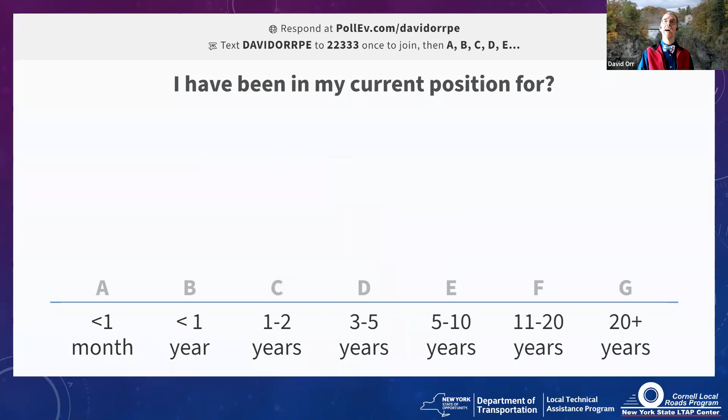Okay, and then next on the plate, how long have you been in your current position? We started asking this question at the beginning of the year and got quite a few folks who are brand new highway officials starting in January, but haven't seen as many, but I do see one today that's less than a month. Over here on the Q&A, we've got a variety of folks, 6 years, less than a year. Okay, so again, quite a variety, and that's good, hopefully you'll pick something up today that you can take home and use and go from there. I see a 40 plus, okay, maybe we'll have you help teach us in the future.

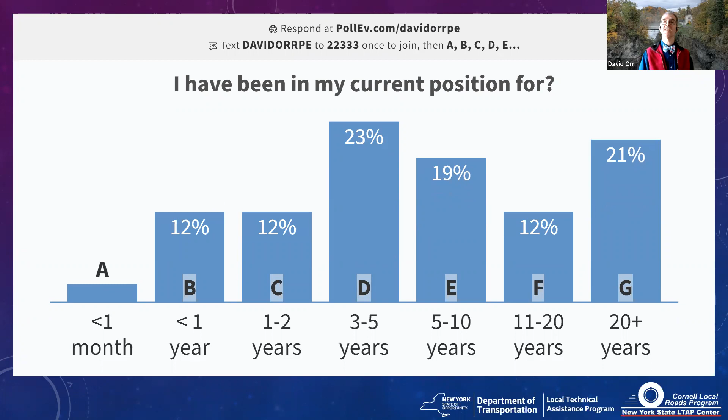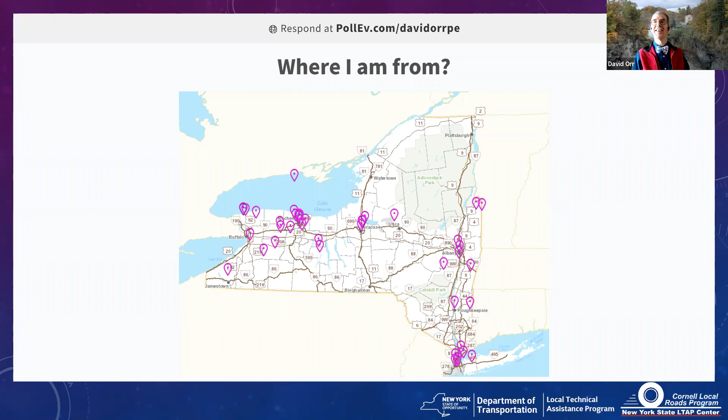I'll give you a reminder of this at the end. So let's go ahead and get started talking about drainage.

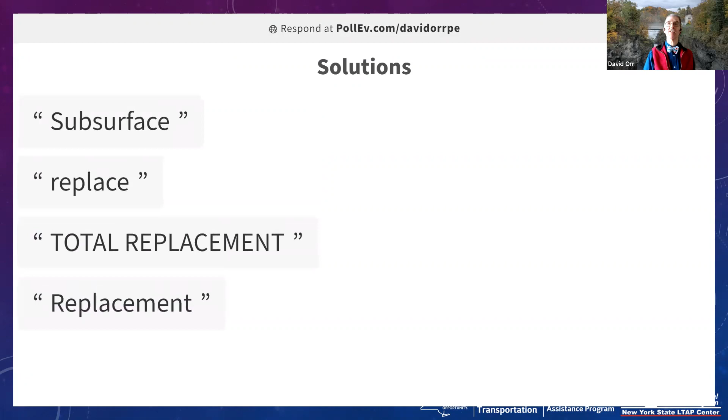Yeah, sometimes drainage problems are easy, you know what you need to do. It's pretty expensive to replace it, and so we're probably going to have to do something major here. Now this particular situation is one where it actually failed twice in one year because of major rain events. This was around when Irene and Lee came through.

If you'll notice, the land is a little bit higher than the roadway in a few spots, especially down towards the end, there's a spot, and even here the road's a little bit higher. What happened was the road became like a stream channel. A lot of our older roads, this happens. You want to make sure the water can get away. So when you reconstruct, think about the drainage, think about the long-term. You certainly don't want to have to come back and do this particular one again. Keep that in mind as we talk about things.

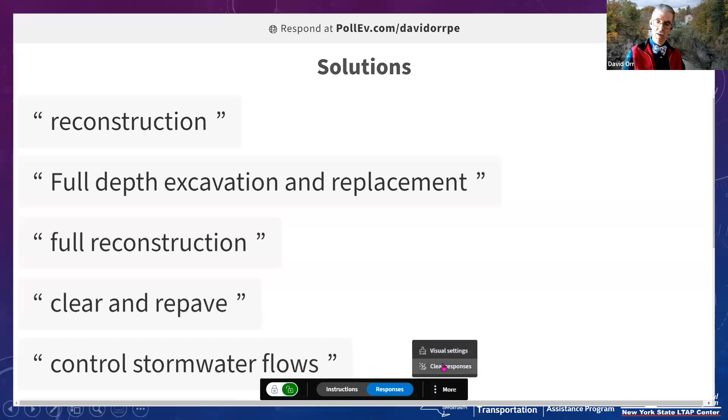Our next one is a roadway that was chip sealed the previous year, and this is in the spring, weather not too different than we've been seeing the last few days, and you can see the chip seal has failed. So what do you think is the solution here?

Somebody said repave in the Q&A. Okay, pave it. Maybe a mill and pave.

Nobody's put anything in the poll yet, or at least it hasn't shown up. Maybe a new wearing course.

But again, when we're dealing with roadways, we're dealing with drainage. You need to think about where the water problem is coming from, and knowing some history can really help. You've got to think about the drainage.

In this particular case, we'll go back to the picture. This had been a gravel road for many, many years. It actually goes down a pretty good hill, and there's actually a relatively good crown.

I'll see if I can get the poll to show up. Maybe they're just not showing up for some reason. Let me quickly check that and see what's going on. Well, let's see if it'll show up here. Ah, technology. There we go, got it working now.

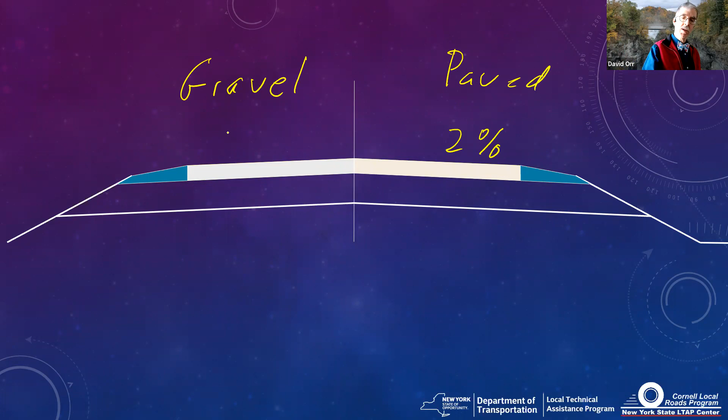But if you think about it, if you've got a roadway that is paved, you need a cross slope that's a little flatter because you've got a nice hard surface that can drain off — usually 2%, or 1/4 inch per foot. If it's gravel or unpaved, we might go as much as 6% to drain the water away.

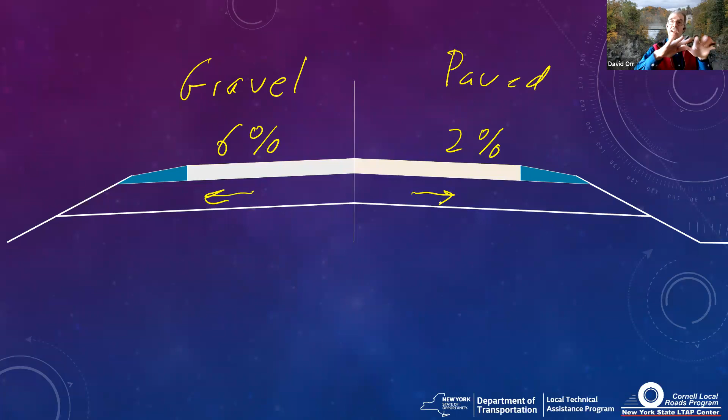And we want to drain the base as well, so we need each layer to have that same slope so the water can drain out. We don't want to trap water out on the edge, so we want a free-draining layer if at all possible. Obviously you can't do that in an urban area, but it really does help quite a bit to have that slope. Now, if you're getting a chip seal, you might go with a little bit steeper than 2%.

It's not quite paved, a little rougher. The other thing you want to make sure you think about is these shoulders over here. Those shoulders need to have a little bit extra cross slope to them. So these are things to think about, getting the water off the roof, through our gutters, our ditches.

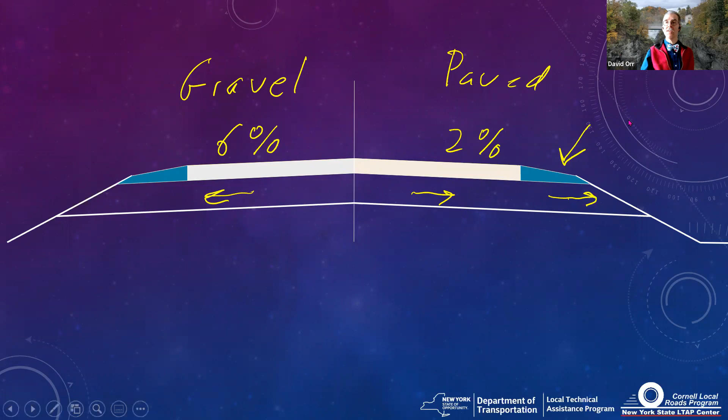Standing water, freeze thaw, all good possibilities. Poor drainage, yep. Too flat, there you go, somebody got it. It's too flat. This is a real well-known problem for gravel roads, is if they get a flat spot, vehicles travel on that flat spot and they create this problem. So crowns are very important. You got to get the water off the roadway, okay?

Now there's a series of videos out by the South Dakota LTAP Center that are pretty cool, and we'll just show a little bit on roadway shape, small snippet. If you want the longer one, look it up or get a hold of us, we can get you a copy.

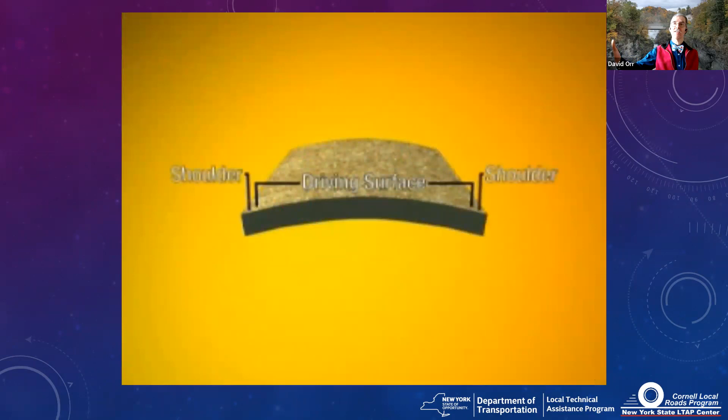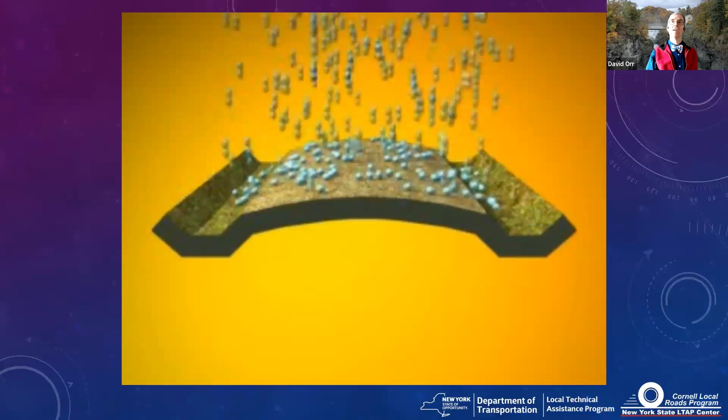So you need a shape to it. The water's got to go off to the sides. The main purpose of the shape of all these elements is to drain water efficiently. Drain the water away, number one item on a good roadway.

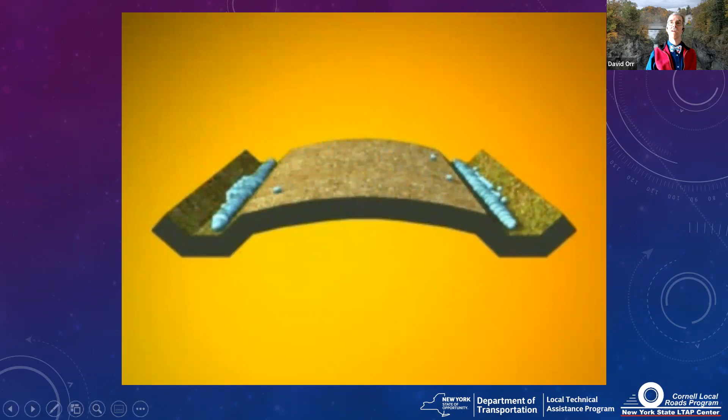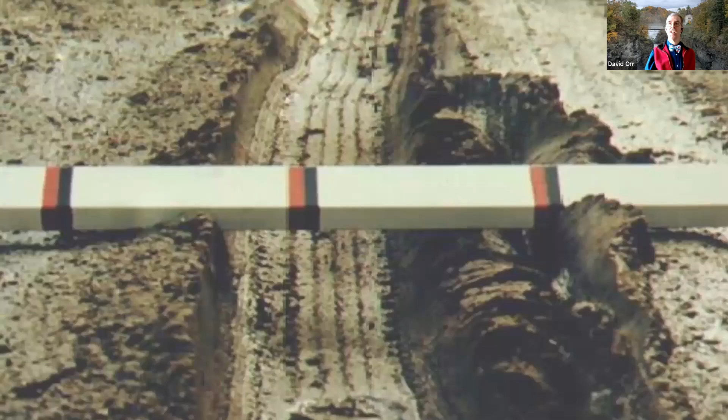That rut was caused by one pass of an old Ford Econoline van that we no longer have. I hit it about 5 miles an hour. If I hit it any faster, the van would still be there. Now, some would say it's a Ford, not a loss, but hey, we had that thing for another 25 years.

So come on, we needed to keep it in good shape. So drainage is part of it. The other part that's a problem, though, that I found was there was no gravel in the mix. That gravel is important to the roadway. There was sand, clay, and silt, mostly silt.

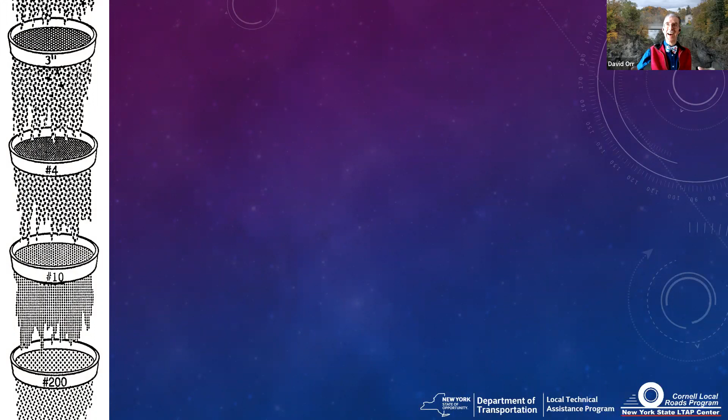When you're building a roadway, the single most important thing is the quality of the base. Your subgrade is the native material, you can't do a lot about that unless you want to spend a lot of money. But your base, you can spend money and create a good base.

So what is a good base in most of New York State because of our freeze-thaw conditions that we deal with? Well, you want to have a percent of gravel, between 50 and 70% gravel. So you need a lot of gravel sized particles, these are the larger particles. And in your handout, we list the sizes that are available. So you really want the gravel to give you strength.

No matter where you are in that prism of the roadway, you need about 25 to 40% sand. The sand helps you with drainage, helps make it dense, pack well, but it still allows the water to have some flowing characteristics. And then there are two lines that we have here.

One line is at 8%, and that's sort of the maximum for anything underneath the pavement. I'd really like 5, but I'll live with 8. We'll talk about why 8% in a little bit, but 8% is sort of the upper limit. The other number that we have here is 15%. Anything above about 15% in spring thaw, it's just a mess. There's not enough strength to it. You've got to keep the fines content down, the silts and the clays.

So this is important. And if you've got a roadway that's got a little bit too much silt and clay in it, the negative effects start to get hold of you. And if you're buying, for instance, state spec item 4, as we call it, but it's actually a type 4 spec, it's for sub-base. It's for deeper layers underneath a really good base, underneath a blacktop.

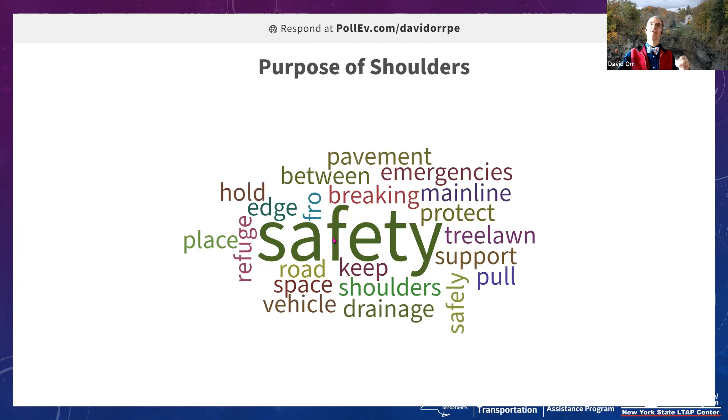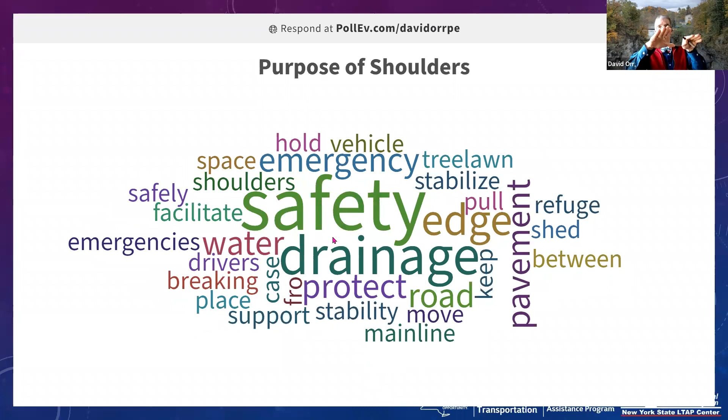Safety is one, emergencies, yeah. Drainage - one of the most important things shoulders do is that if we wind up running off the road a little bit, just a small amount for emergencies, it doesn't cause us to have a crash. I see road support showing up a lot - that's really important, we back that roadway up so it doesn't push out, it doesn't crack. It stabilizes everything. Drainage is on the list too - it helps carry the water from the roadway down to the ditch. That's why it typically has a slightly steeper slope, because it builds up over time and tends to be rougher, so it needs to have a little bit of a slope to it. Not a huge rollover, but a little bit of rollover.

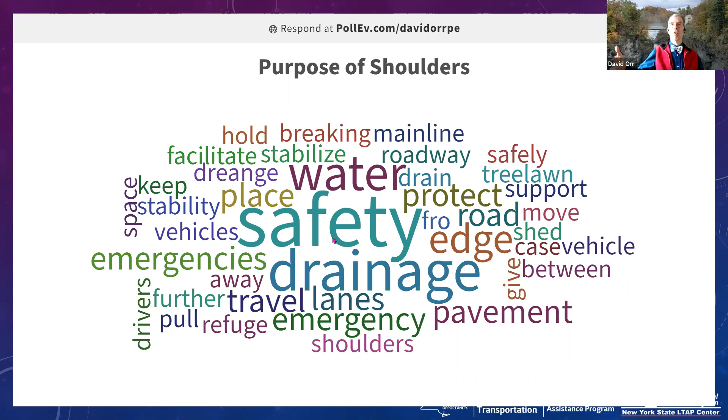Now, what I don't see on here, and I'm a little surprised by, but we all do live in the north - maybe everybody forgot about the fact that 2 days ago there was lots of snow still all over the place. We do use those shoulders to store snow when we don't have time to cut the shoulders. So sometimes we'll use them for snow storage.

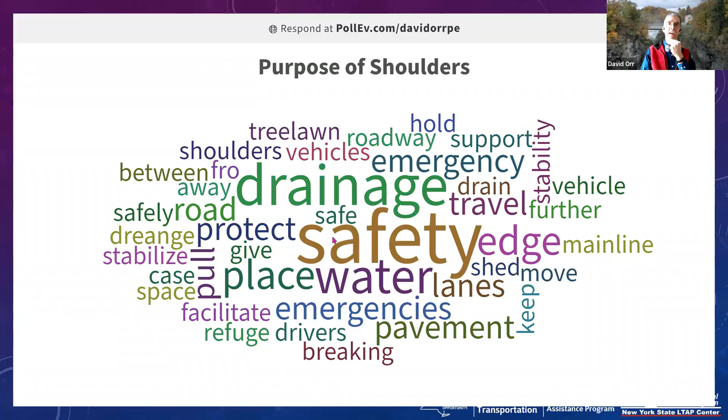Somebody asked in the Q&A what's the name of the device or tool you'll use to measure the proper slope for a road, the crown. There are 4 or 5 ways you can measure that. I'm a big fan of the hand level and an engineer or carpenter's rule, and you can just measure that out. You might use a tape measure. Some people make a grade board. They'll take a 2 by 4 and a 4 foot level. You can use just a 4 foot level, but they'll also make ones 8, 10 feet long out of plywood, and they can actually put a notch on it to adjust the level, and you can measure the grade that way. Construction people really like those, and they fit in the back of a pickup truck. And of course, you could survey it, but most of the time we're using hand tools because we're trying to just do it in the field, okay?

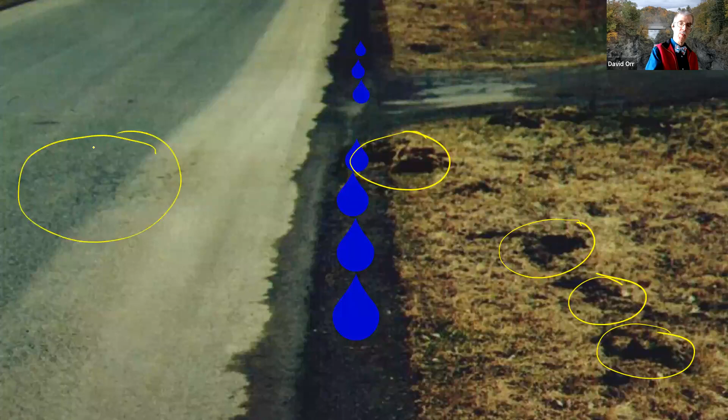Now, shoulders need to be cut, but when they're cut, they need to be done properly, and that's done with a grader, okay? There is a technique you can use, other tools, but the grader is really the best tool for the job. A snowplow is the worst tool for the job. This happened, somebody pushed it with a snowplow. You can see where they hit the edge of the shoulder and threw stuff in people's yard. All this is really going to do is help get water back under the roadway. You can actually see where it's saturating the roadway. You can see spots where we're starting to get some incipient cracking going on. And of course, you're going to get that neighbor who's a little upset with you because you pushed dirt and stuff into their yard, and can't really say that I blame them. So you got to cut shoulders on a regular basis, but you got to get it so the water can drain away, number 1 rule. Now, one thing I haven't mentioned is urban areas.

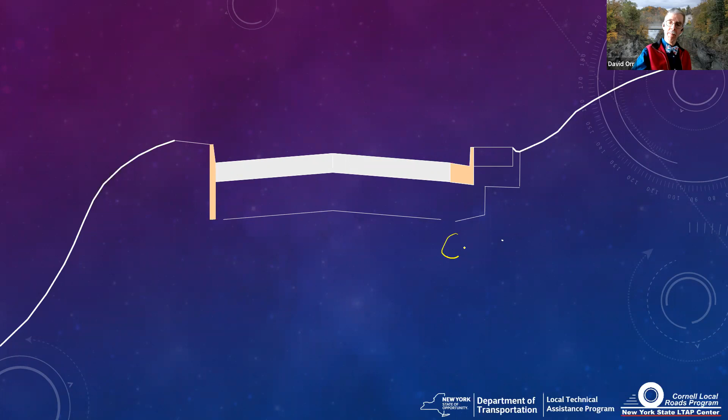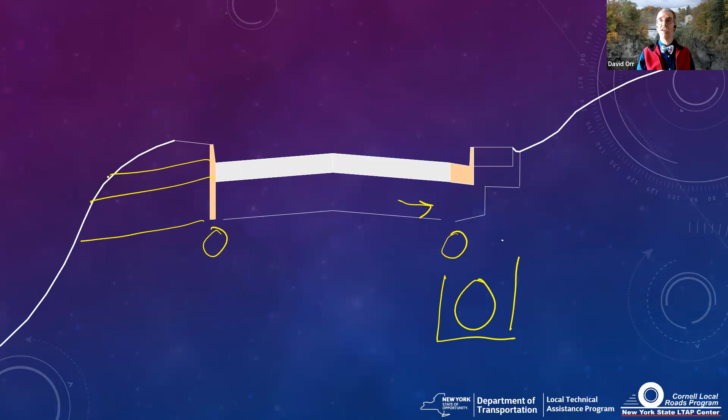Curbs and gutters act as our shoulder and ditches in an urban area. So they're pretty important as well because they're carrying the water. Now, when you're doing subsurface water investigations, and we're going to be talking about that in the second half of our hour together, that's the perfect time to think about putting in any subsurface drains when you're putting in your curbs and your gutters. And remember, you need to drain that base out as well, either by having subsurface drains, taking the subsurface water down to your stormwater system. You're not going to be able to come in here and put in a free draining layer. I don't think people would like it if you start putting ditches back in their front yards. So again, think about where the water is going. Don't trap that water, okay?

Now, something we have to worry about at the end of winter or in the middle of winter is freeze thaw. Freeze thaw, in fact, is actually one of the drivers on the quality of our gravel. So got to be thinking about that. So let me explain freeze thaw to you. It's really because of a combination of permeability and capillarity.

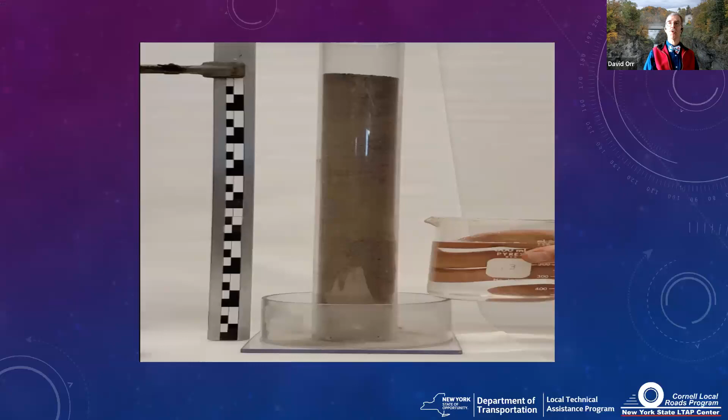So let me start by showing you a video on capillarity. Watch, this is a time-lapse video. We poured water into a frost tube. There's a reservoir at the bottom, and you can see how the water actually pulls up over time from the reservoir at the bottom. The finer the material, the higher it's going to rise. You can see in only 1 hour, it's up a good almost 3.5 inches from the water surface. And over time, it will go right to the top of this little sand column, which is 8, 9 inches tall. If it's a really fine material like a silt, it can be even higher, and clays can even be higher than that. So capillarity is an issue.

And of course, we also worry how quickly the water flows through these various materials, okay? So just to show you that one more time, you can see how quickly it goes up.

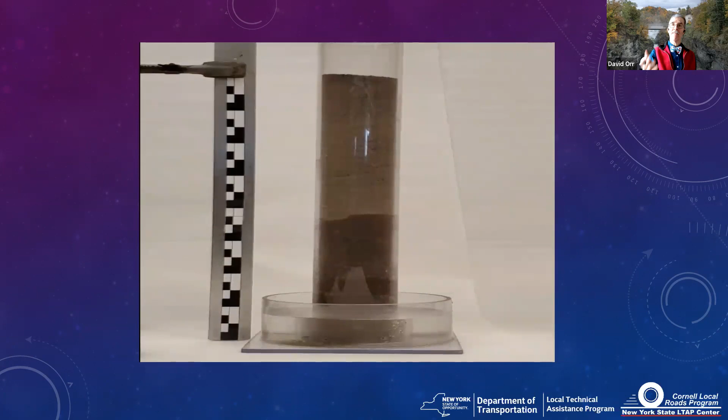Now, why does this matter? Well, because if you have that free water available, it gets pulled up by capillarity, and you can actually get frost lenses forming. Here's a video from the Army Corps of Engineers. There's a newer version on the web, but the video part I'm going to show you is still the same. It's still an old frost cabinet with a high-tech timing device. So here's the video, frost action in soils. You can see the time lapse of actual frost issues. Now they've got it in a freezing cabinet, projected at normal speed, and you can see what's going on here. It's a time lapse of several weeks seen in several minutes.

Okay, let's see if this thing will keep playing. There we go. So there's our high-tech timing device. And you can see the scale on the left is moving, and there's the line of frost that they show you in the video.

This is a silty material, which is really bad for frost issues. They started the experiment at a water content of... okay, I'm off by a second... 19% water. So a lot of water in there, a pretty high amount.

Remember, there's a pool of water at the bottom being pulled up by capillarity. If that pool of water is available, little ice lenses form, picking the roadway up. That's not good because it creates heaving, which we don't want for a variety of reasons. When they did this experiment, they had to move the camera and their timing device to the bottom as the frost keeps moving.

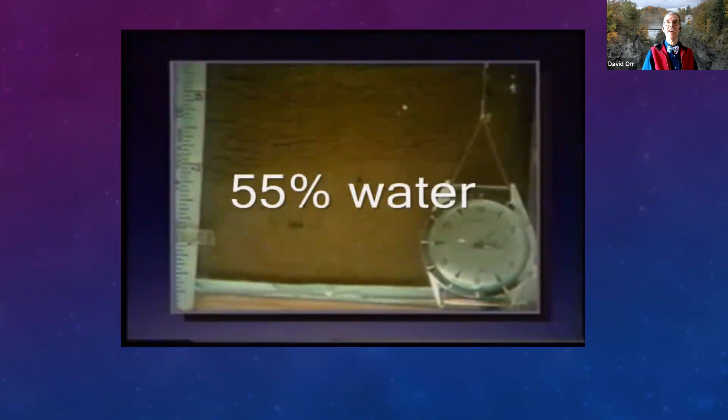This is a 6-inch high sample. Water content was 19% at the start, and 55% at the end — a huge amount of water pulled into the sample. That's not good for anybody. And of course, 4 inches of heaving, that's 2/3 the height of the sample.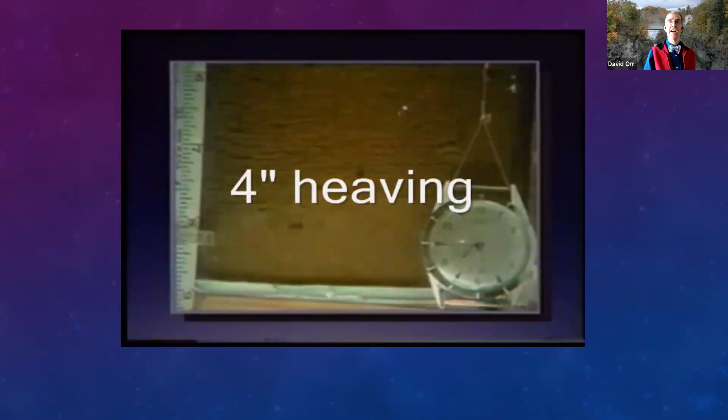This is a New Hampshire silt, again a really bad material. There are two issues: first, you get movement of the roadway; second, all that water is now in the roadway, and it may not be thin lenses, it may be thick ones like this — this one's 3/4 of an inch across.

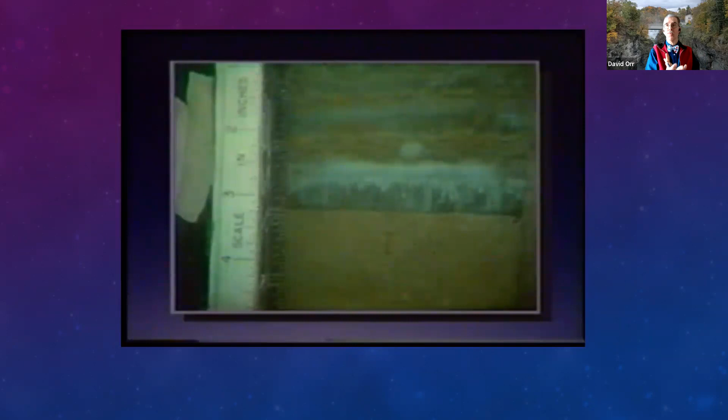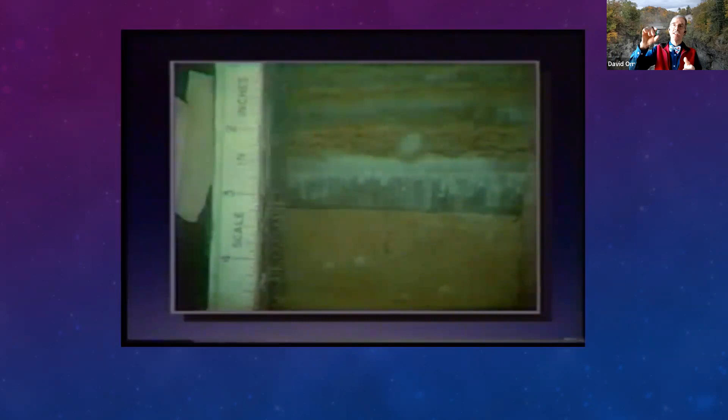I've seen culverts being replaced in winter because of problems with 1, 2, 3-inch ice lenses, not uncommon especially with glacial tills like we have here in New York State. All that water has to drain out, and it may not drain out where we want it to. Keep that in mind.

And of course, it leads to our friend, the pothole. We are entering pothole season, though we actually had that last month with the first thaw. Look underneath, make sure you take care of your drainage, and make sure you get your surface in good shape as well.

Now, you could do what they do in Vermont — they just put up a sign that says frost heaves, okay? That may not be our first choice.

We cannot replace down below the depth of frost. Frost depths vary quite a bit in New York State, but they're going to be 2-3 feet or more depending on where you are. And if you put in good clean material, the frost actually goes deeper because those clean materials freeze faster. So don't try to just go below the depth of the frost.

We're not building a foundation for a house and water lines, we're building a roadway. So try to have uniformity to everything so the road goes up and down as a unit. That actually works — in fact, that's what's happening on most of our roadways.

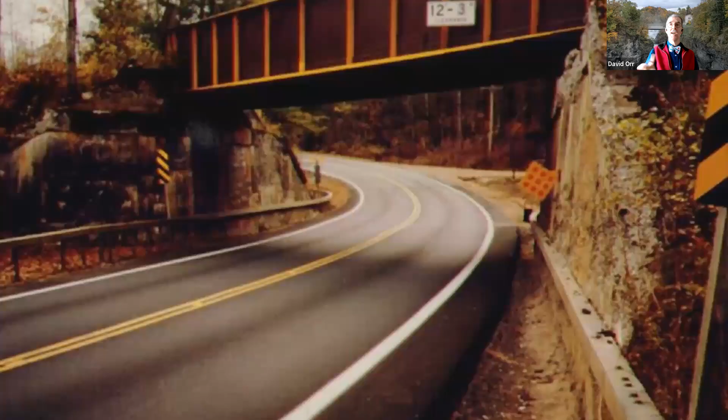Here's a picture I took — no, I was up to Lake Placid for a conference about 20 years ago. I'm driving through the Adirondacks, and we went under a bridge in a place called Thendara near Old Forge. You can see it was paved around the corner, it looked really nice. But by the following spring, the road had already begun to heave.

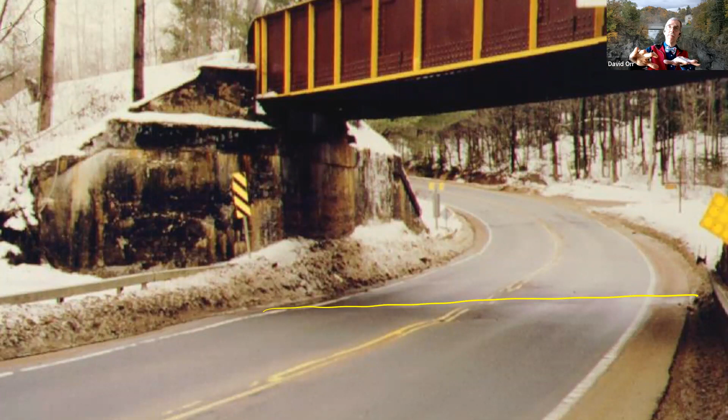Now, this is a bit of a challenge. There's a culvert going diagonally underneath the railroad bridge. You can actually see the location of it because it's heaved, and the culvert stayed the same. It's a box, very difficult to fix. Eventually the state had to come in and put approach slabs to reduce this problem. Very difficult situation, but don't just pave it if you know you've got a heaving problem.

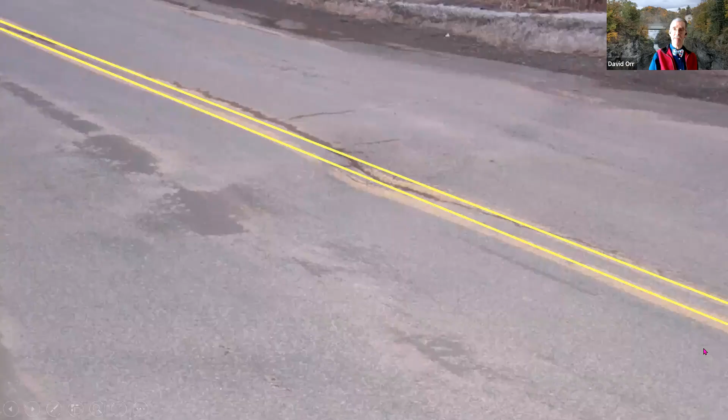And if you're thinking that's a problem only because of the high box culvert — well, no, it happens on a lot of pavements. Here's another place. Obviously the yellow lines I added to the picture, you can actually see a dip in the center line of the roadway. I don't think that was put in that way. What's happened is there's a small, I think 12-inch corrugated metal pipe underneath there.

It stays perfectly still, and the road heaved up around it because we backfilled it with nice clean material. All of us as engineers, we like to spec clean material that doesn't frost heave. But the road around it moved because it does frost heave.

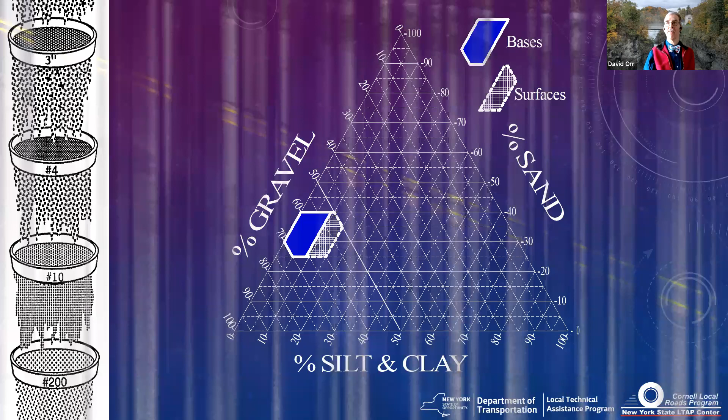So let's go back to our drawing that we had before. Remember, I showed you these percentages, and I mentioned there was a breakpoint line here at 8%, where I don't want to be above 8% for my base gravel. The reason is it turns out above about 8%, the frost action starts to become a dominant feature in the mix.

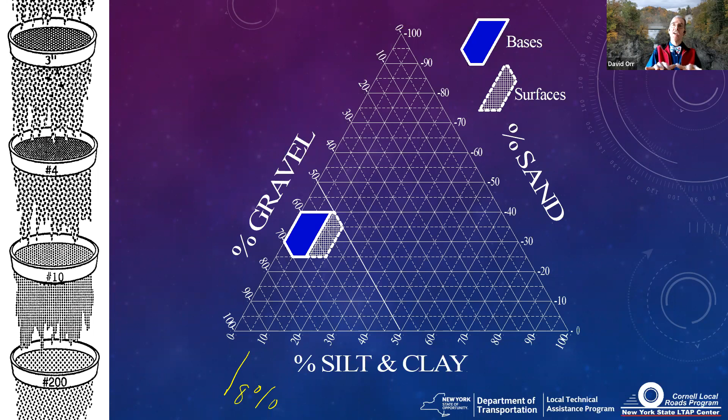And so this is a problem for us. If you're using that type 4 material, the sub-base material in the state spec, it allows 10%. So you can get frost heaving even though the material is inside the specification. So 8% or less is even better, 5% would be even better than that. Reducing that frost characteristic reduces how much water it holds as it pulls the water up in the middle of the winter and stays soft in the spring. Somebody put into the Q&A that if you've got a bridge like the one in Thendara, frost effects

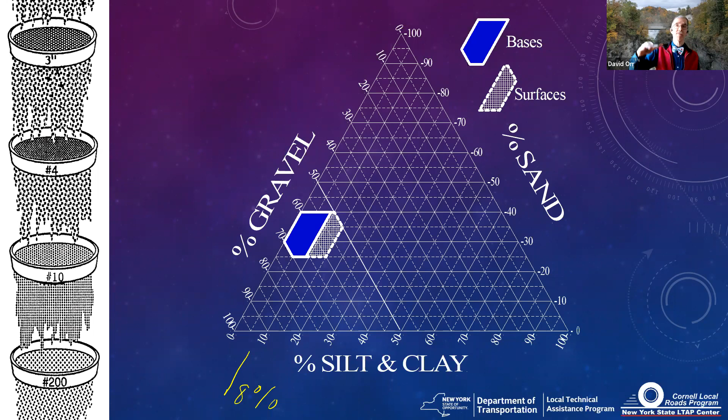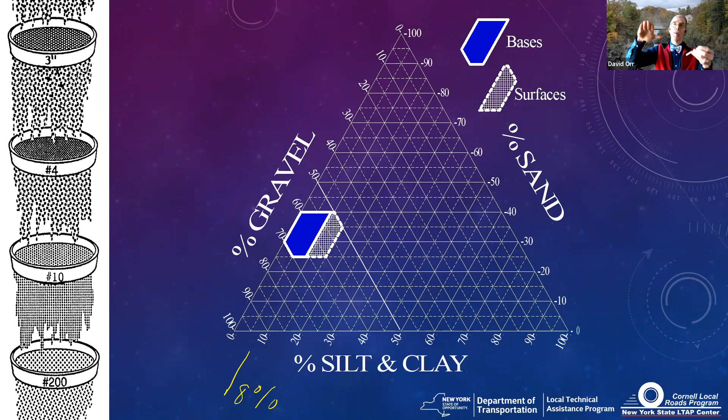may affect the height clearance. When I worked in Yates County, we had a railroad bridge where it would actually change, you could see it over the year, the roadway would move. So you have to think about that: what is your actual clearance? It's the lowest clearance during the winter when the road's heaved up, okay?

If you've got a road that looks like this in the spring, and you see little spots all over, don't just assume the pavement is old. Check it out, do a test pit, check to see what's going on underneath. I will not be surprised if you start seeing fines contents higher than 8% - 12, 13, 14% would not be uncommon. So look carefully at good quality in the gravel, and then you can think about putting in subsurface drains, okay?

Now, when a pavement is frozen in the winter, it is extremely strong. That is when the pavement is strongest, when it's completely frozen. But of course, when spring thaw comes along, it thaws from the top down. Yeah, a little from the bottom, but mostly from the top down because of this thing called the sun - that's where the heat comes from.

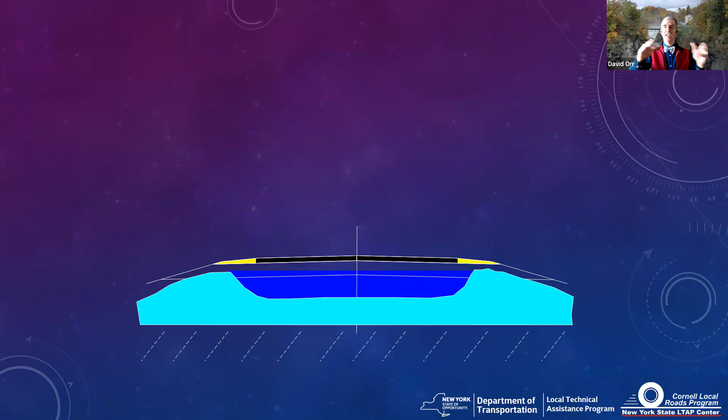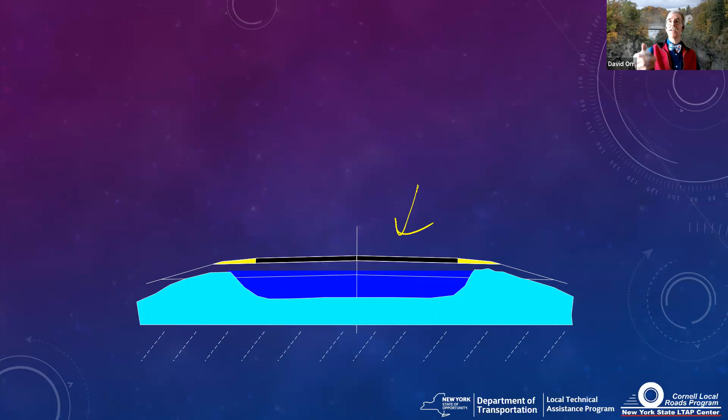Now, if you've got a really soft soil underneath, you may think about putting in a geocell or geogrid or something to help spread that load out. Great option, but do me a favor: when you do that, a lot of times we like to put a separation fabric in here to separate the subgrade from the roadway itself. Take that fabric, make sure it goes outside the edge of any geocells or geogrids so that you don't get an edge effect problem. So take it out - it's cheap insurance, okay, to keep those materials from mixing together, pumping together.

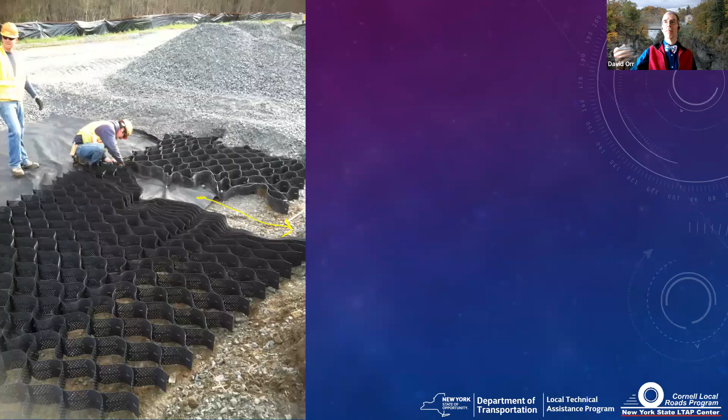You don't need big rocks. You just need single-sized rocks. You could actually use number ones or number twos that compact pretty well. Heck, you could even use concrete sand. And you wouldn't even need fabric in that particular case because it will still drain amazingly well.

Drainage is key, but how you build it is key as well. And if you're going to use a fabric anywhere near the roadway surface, we recommend using the non-woven, the more pliable felt-like fabric than a woven material. This is a woven fabric, it's more puncture prone. And if it does puncture, all the water and clay and silt tends to want to go to that particular one spot. So keep that in mind if you're going to use fabric as a separation material.

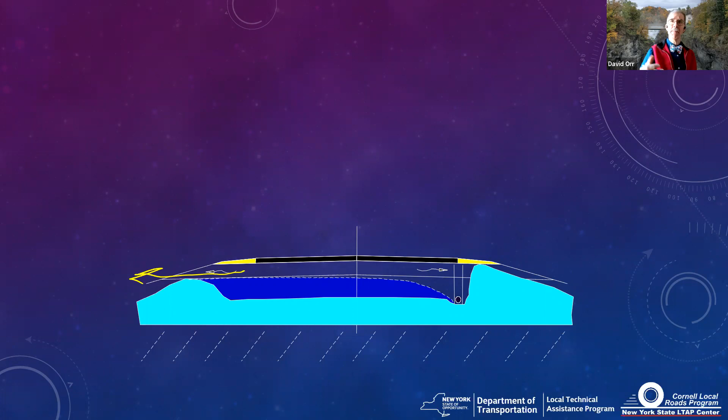So let's talk about subsurface drains. We've talked about the surface, the quality of the gravel. Now let's talk about subsurface drains. There are two ways you can get water out of the base. You can have a free draining layer, where the water comes out the side. Yeah, there's probably some organics on the surface with some grass and things like that, but for the most part, as long as it's not too thick, the water can get out that side. It's a free draining layer, and we like that. In rural areas, that's really preferred in a lot of ways, but you can't always do that.

In an urban area, you would have curb and gutter that would stop you, or sidewalks. And a lot of times the roadway got built up over time. So we put a subsurface drain in to take the water primarily from the base, but we get a little bit of drainage from the subgrade as well. So that's subsurface drains.

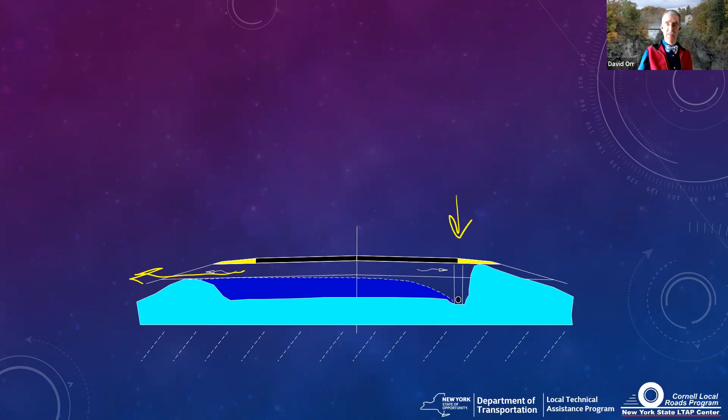Now, those are great tools, but we have an old road system. And those old roads have been widened over time. This particular road is either, and I can never figure it out, I've looked in the books and I don't know for sure, it's from a book put out in 1908 by the Department of Public Roads, which nowadays is called the State Department of Transportation. It's either the Jericho Turnpike or the Sunrise Highway. They're a little wider today than this, and they're paved.

Now, hopefully, every time you pave a roadway and make it a little bit wider, you do a good job of making sure the base is out beyond the edge of the pavement, and preferably a free draining layer if you've got an open system. But you and I both know that's not always what happens.

We might have had an old roadway that was only this wide, and out here on the edge we had some dirty material. So when we widened it, if we just paved it wide, that dirty material is still there and the water can't get out. So if you came in here with that dirty material and thought, oh, I'll just stick a subsurface drain here at the edge of the pavement and take care of my problem, it's not going to work, because now the water is trapped in the middle. You've created a bathtub.

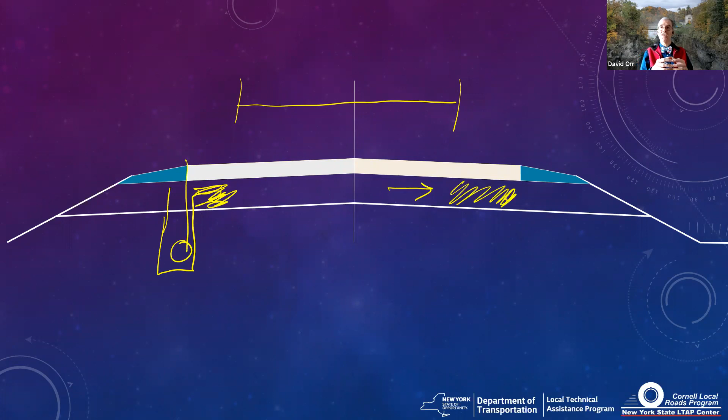There was actually a time when that was actually a standard. We would build the road into the native soil, and it wasn't great. You've got to get those materials drained out.

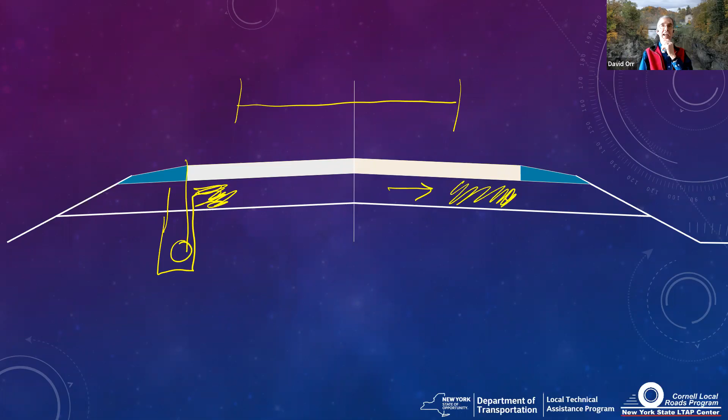Now, what does the road look like that has that problem? This might look familiar to some of you. The center of the roadway looks pretty good, but that outside one, two, three, or in this case, I hate to say it, four or five feet are all breaking up. Coming over here at the edge and putting in a subsurface drain is not going to do us any good. We've probably got to look at the base underneath.

Subsurface drains really only do three things for us, and we have to keep that in mind. So let's talk about what those three things are. The first thing subsurface drains do—and normally we put them at the edge—we put in a subsurface drain, and it intercepts the flow of the water. Heck, the ditch does that a little bit as well, by the way, but don't go too deep on the ditch.

But now, if you think about it, the water's going to drain down to this. It'll come back up pretty quick too. But we intercept a lot of the flow of the water. We trap it before it gets to the roadway. Now, it'd be nice if we could go all the way down to where there's an impervious layer deeper down, because then we'd intercept 100% of the water. But it's not economical. 3-4 feet is usually the maximum depth, and unless you've got an impervious layer fairly close, you're not going to find that. But intercepting can be very useful, okay?

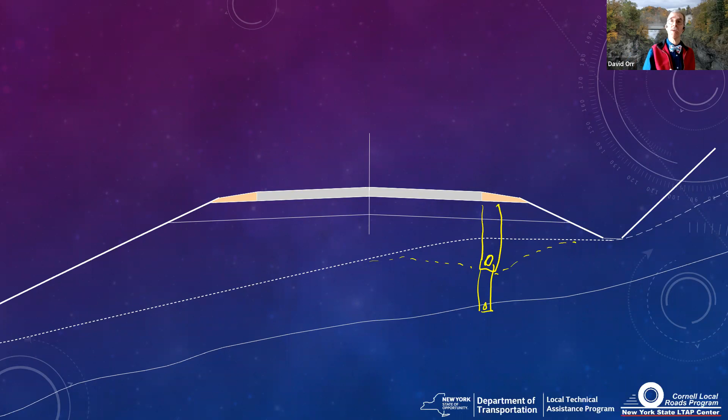And yes, it has to be perforated. Subsurface drains are actually made out of perforated pipe. When we put them in, HDPE is the common one we use today. We used to use clay around houses many years ago, you may come across that, or we used old PVC with holes drilled in it. If you ever come across that, hopefully the holes are on the bottom. How you backfill those is important. We actually recommend concrete sand, because then I don't have to use a fabric, but the key is you can intercept the water before it gets to your roadway.

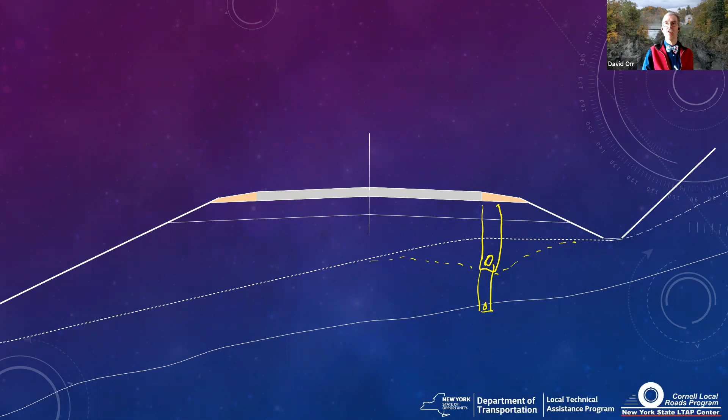Think about where the water is coming from. Look at your side hill situations. There are times when agencies have actually come into the ditch line and put their subsurface drain there. It doesn't have to be at the edge of the shoulder, but a lot of times we like it at the edge of the shoulder, because remember, one of the primary things is we're draining out the base. We don't want any extra water in the base that hopefully is clean and drains real well.

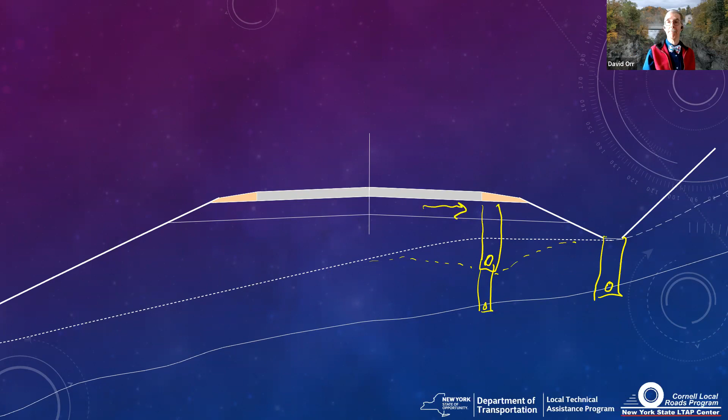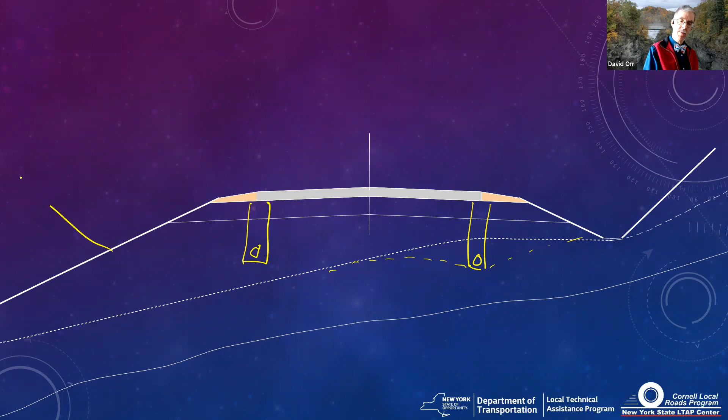The other thing you can do is theoretically use it to lower the water table. So I'll put my subsurface drain in on both sides. We like it on both sides in this case because we draw the water down. Didn't do much good over here, so in this case it may not have helped that much. But if we were in a low fill situation where the water table was really high, like a fill over here with water running through here, we'd lower that water table a little bit.

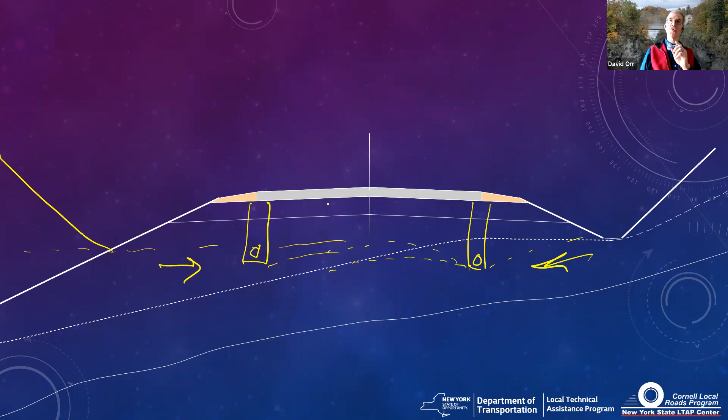But remember, here's what drains really are doing, whether they have a pipe in it, perforated, or they're just a French drain with no pipe.

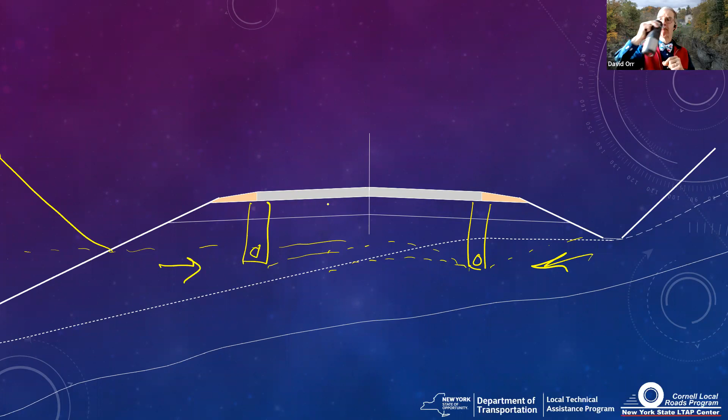What they're really doing is pulling water that comes out by gravity. It's like taking a sponge - put a sponge in water tonight when you're washing dishes, let it get soaked, and pick it up. Water is going to drain out of it, but at some point it'll stop. But there's still a lot of water in that sponge - you squeeze it, all that extra water is still there. And again, that's why we want the fines content to be as low as possible, because more fines holds on to more water. So you really want to get the fines content as low as possible, especially in the base of the roadway.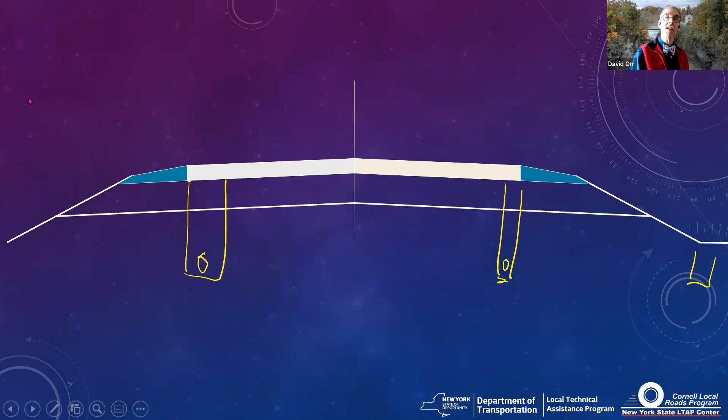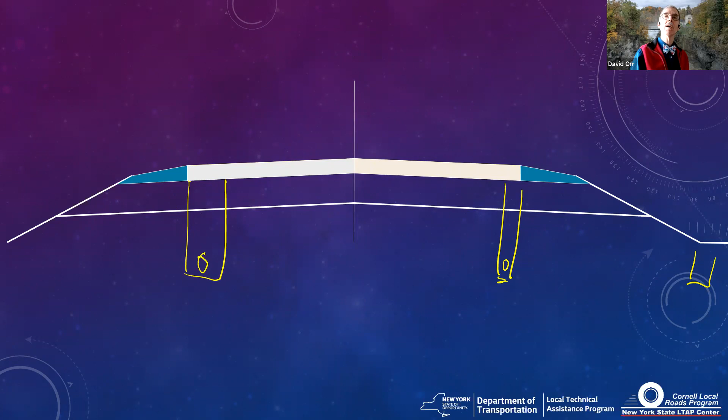Now, where we put it - somebody already asked about that. We usually put it on the edge. Sometimes we put it out here on the far end. What do we backfill these things with? Again, we recommend concrete sand, or if you don't want to use concrete sand - let me draw this extra big just to show the scale. Let me purposely get a color here that's different, and a color you can see with this background. How about we try a green one? That should be pretty good.

What you also need to be thinking about is putting in a filter fabric wrapped around the trench to protect it, if you're backfilling it with something like pea stone. Because otherwise what will happen over time is the fines, especially from the lower part here in the subgrade, will tend to plug up and cause your system to fail.

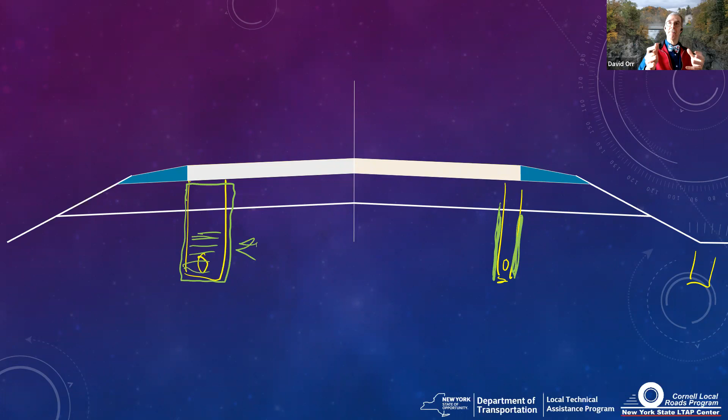One of the interesting things is everybody thinks what happens is this fills up with silt over time. What actually happens is whatever you're backfilling it with, this interface is what actually fails. That's where the plugging occurs, along that interface point where the water changes velocity. That's the filtering effect you probably remember from geotech if you're an engineer.

This is something you just have to think about. The deep line will actually help you. You don't need to put a fabric around the pipe, though you can do so. The real key is to make sure you've got good drainage in all of those cases.

Somebody here says number 35 gravel. Off the top of my head, I'm not quite sure what size that is, but we recommend pea stone, either with a fabric, or concrete sand. New York State has a good spec for concrete sand. It's been tested for freezing and thawing and actually drains pretty well. That's the reason we recommend it, and there are agencies who've used that for years.

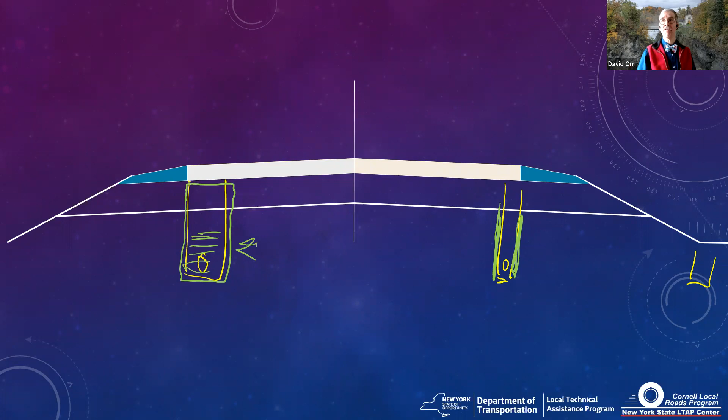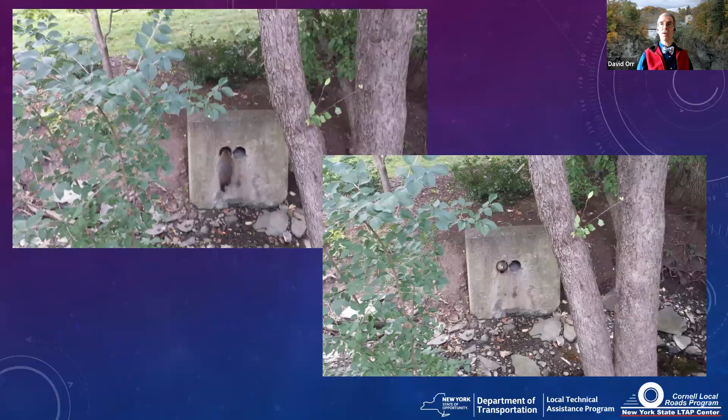Better yet, use black HDPE and protect the ends with animal guards. If you don't have animal guards, well, you're going to make the woodchucks and the other critters very happy.

This happens to be a subsurface drain around the administration building here on campus. There's a woodchuck I haven't seen in a couple of years, didn't see him during COVID, so I hope he's okay, but he used to live there. You could catch him on a regular basis if you caught him at the right time of day. He lived in there on the subsurface drain because they can cut through those black HDPE pipes with their claws, and you made them a nice entrance.

So put in animal guards, they really do help quite a bit. Be aware of that and we'll go from there. So this is a quick tour of surface and subsurface drainage. What I'm going to do now is we're going to see how you did.

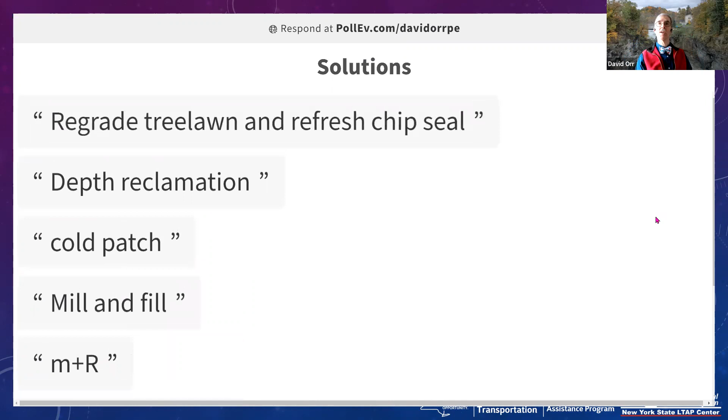And the poll results will come up. I've already got the ones above, so we'll start with the new ones. Cold patch, somebody put. Depth reclamation. Regrade the tree lawn and maybe refresh with a chip seal, mill and fill.

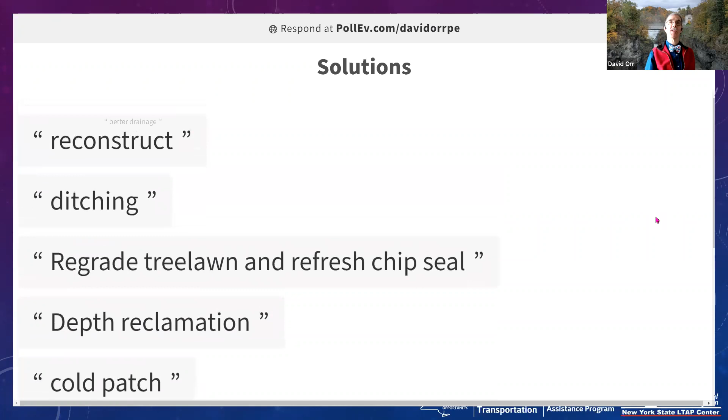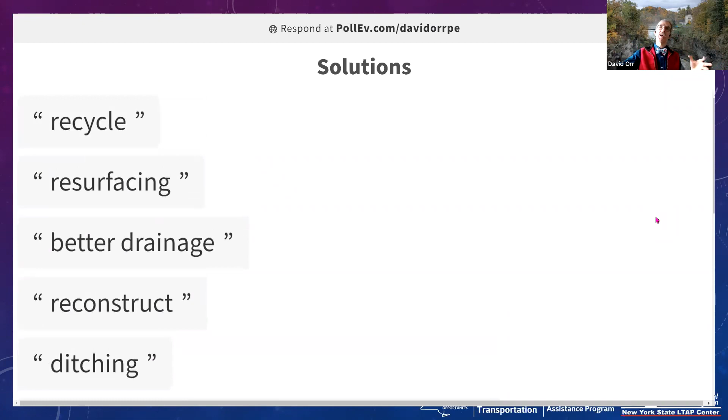Somebody said test the soil. Yeah, you need to figure out what's going on. Reconstruct possibly, yeah? And again, we all have limited budgets, so you may be thinking about what can I do short term, what can I be doing longer term. You might think about recycling it.

Traffic doesn't help, hurts a little bit, but this is primarily a frost issue. So longer term, you may need to do some cutting and filling and replacing the base, but you also want to make sure that anytime you have a side hill, you think about intercepting that water before it gets to the roadway. Does it have a proper cross slope?

Now, somebody says, is the crown appropriate or should the surface be superelevated to slant to the left? You can do that, by the way. That is actually done. Let me just come in here and clear all the picture lines because it's easier to draw. Okay, so what he's talking about is having it all slanted to one side or the other, to the left, okay, or to the right.

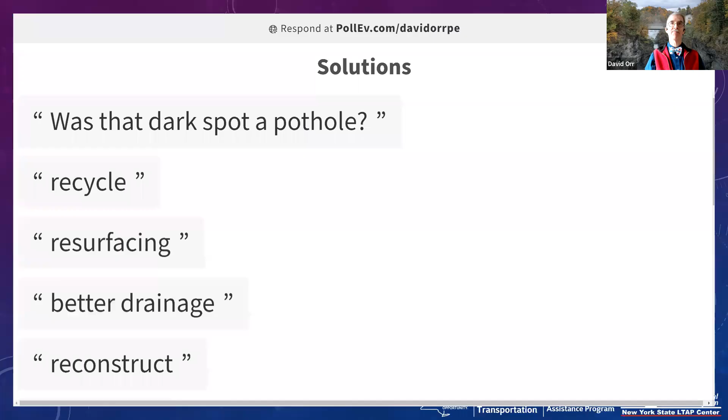Okay, here's one. I think this one should be pretty easy. Hopefully everybody can get this one here.

I'll pop the solution page up, or somebody put it in the Q&A. Got to cut the shoulders. Possibly pave the road.

That's actually an important thing to think about. When you pave a roadway, going from gravel to paved, be aware that on a gravel road we want some fines - that's our binder. If we just pave over the top of this roadway, now there's too many fines, and it's going to have a problem in the spring. That's what actually happened in our chip seal case we saw earlier. The fines content was about 12% - really good gravel surface, but when they chip sealed it, they didn't change the fines content. Now it's too much water and it failed.

So be wary of paving a gravel road. Let the traffic help you figure that out. But yeah, cutting the shoulders, okay.